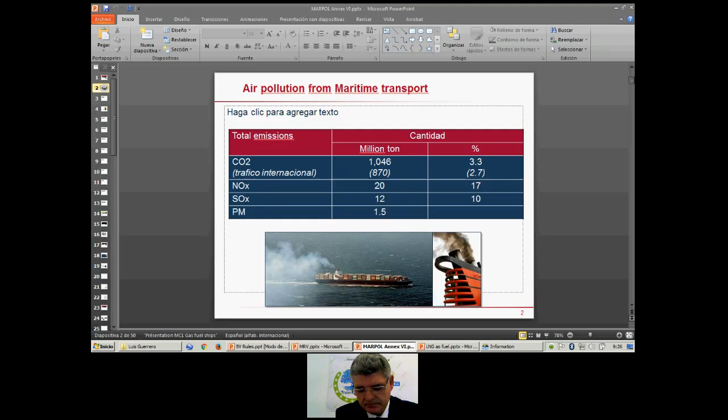Now we are going to concentrate our presentation on Annex 6. It means air pollution. Annex 6 is in force since May 2005. It applies to ships over 400 gross tonnage and also to offshore units built after 2005. The compliance of the ship with Annex 6 to MARPOL will be marked by the issuance of an IAPP certificate, International Air Pollution Prevention Certificate.

As I told you, Annex 6 was adopted in 1997, but it only entered into force 8 years later. You know, there's a ratification process, and it took 8 years to ratify and to enter into force. Its purpose, as I said, is to limit shipboard air pollution, ozone depleting substances, shipboard incineration, SOx, NOx, particulate matter, and volatile organic compounds.

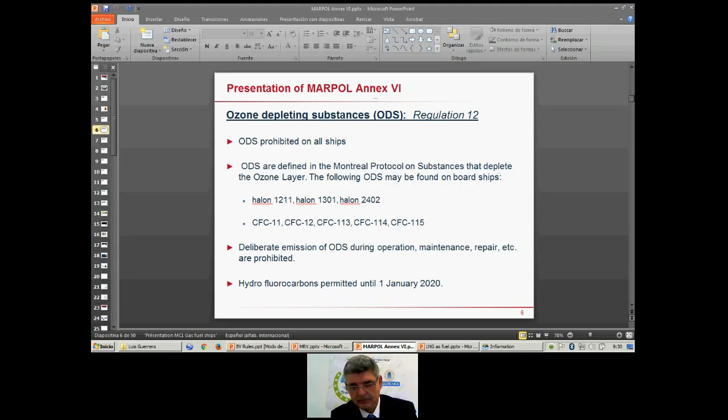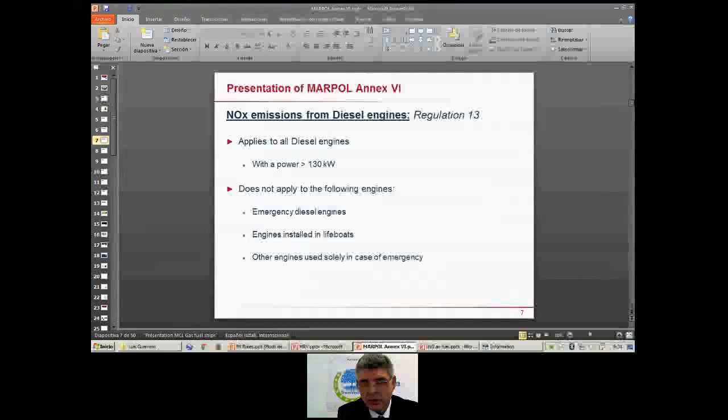For diesel engines, NOx are limited. This Annex 6 applies to diesel engines with a power over 130 kilowatts, and it doesn't apply to the following engines: emergency diesel engines, engines installed in lifeboats, other engines used only in case of emergency.

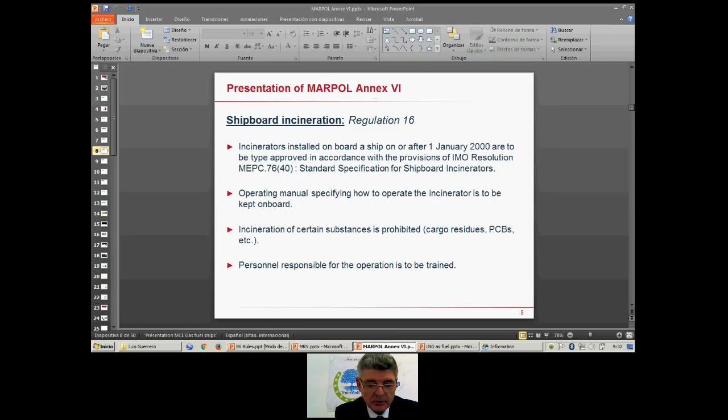For shipboard incineration, Annex 6 requires incinerators installed on board a ship after January 2000 to be type approved in accordance with requirements in the convention. There has to be an operating manual specifying how to operate the incinerator in order to facilitate the crew to use it and to prevent air pollution. Incineration of certain substances is prohibited, such as cargo residues, PCBs, and so on. Personnel responsible for the operation is to be trained.

Regarding fuel oil quality, the appropriate authorities will have to maintain and register a local fuel oil suppliers list. Details of fuel oils used on board shall be recorded by means of a bunker delivery note containing the following information: ship name, IMO number, port, and so on.

But the most important thing is the density at 15 degrees Celsius and the sulfur content, because the important thing for the annex is the sulfur content.

There has to be a declaration signed and certified by the fuel oil supplier representative that the fuel oil supplied is in conformity with Regulation 14 related to sulfur content and Regulation 18. You know that most fuels used in the marine industry are blended, so that is why the certification from the supplier is important, because only the supplier knows the composition of the blend and the sulfur content.

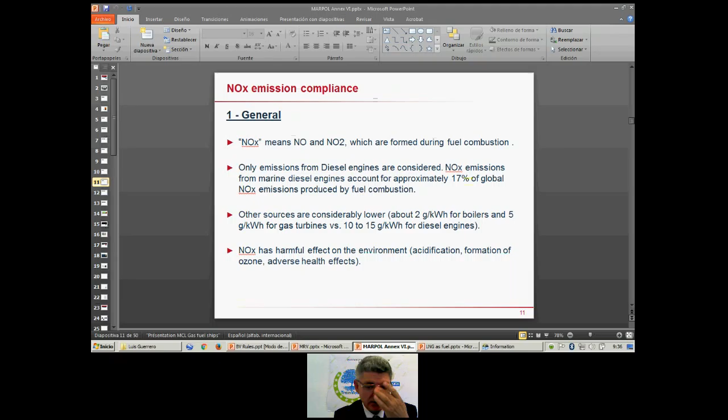The NOx emissions are influenced by the combustion process. It means that the NOx emissions depend on the technology of the engine. When the combustion temperature and duration increase, the amount of NOx formed increases too. Higher peak pressure and compression ratio result in higher NOx emission levels.

NOx influencing parameters include injection parameters: timing, nozzle, pump, fuel cam, injection pressure for common rail systems, and so on. Combustion chamber, cylinder head, piston, cylinder liner, compression ratio, valve timing, and charge air system: turbochargers, charge air cooler.

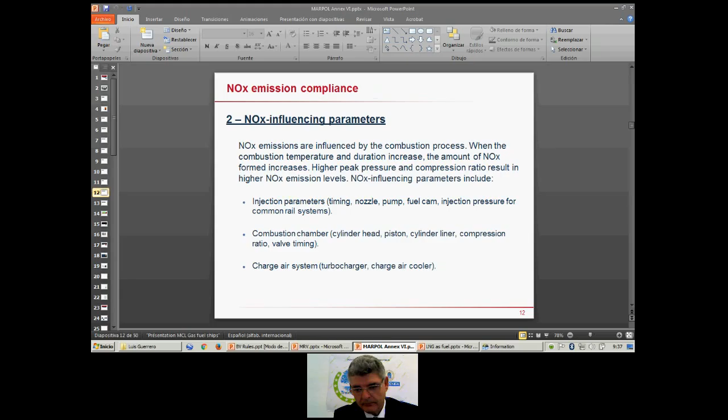Equipment to reduce NOx emissions: there are several solutions. Direct water injection, charge humidification, emulsified fuel water emulsion, exhaust gas recirculation, selective catalytic reduction, injection of urea solution. There are several ways. Only SCR is complying with Tier 3, that I will show you later.

But the purpose of all these methods is to reduce the temperature and the pressure inside the combustion chamber, in the cylinders of the engines.

Well, as a consequence of the Annex 6, some emission control areas have been established. You can see in the map there is an SOx. The emission control areas may be for SOx or for NOx or for both, or even for particulates. In the North Sea and the Baltic Sea, there is an emission control area for sulfur. It's called SECA.

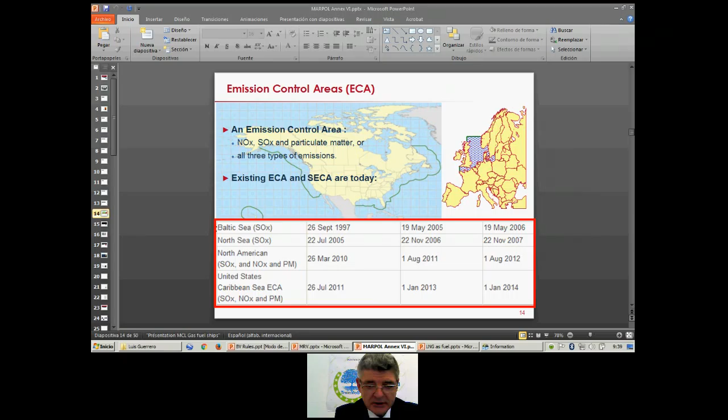But not only that, even in EU ports and in sulfur emission control areas, the maximum allowed is 0.1%. It means to reduce drastically. We have reduced drastically, and we can be satisfied with this achievement.

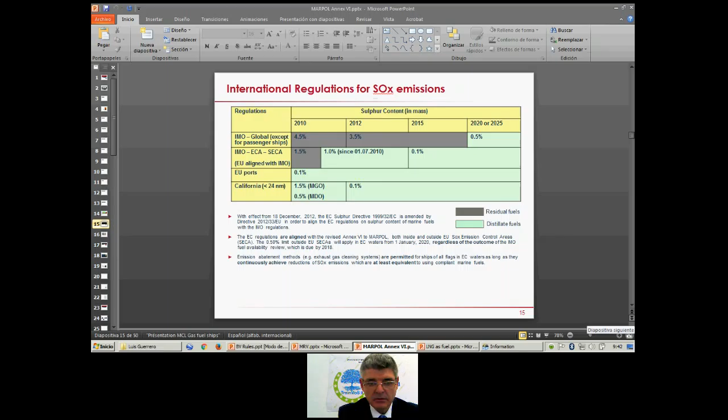It's not easy to reduce SOx emissions, because the sulfur content in the fuel is the one provided by the bunker supplier, and the sulfur existing in the fuel tanks will go out in the exhaust gas. So you have to either reduce the pollution caused by sulfur by using low sulfur fuels, or clean the exhaust gas.

But low sulfur fuels are more expensive, and cleaning of exhaust gases requires additional equipment, such as this one displayed in the picture, whereby you use some components and you will also recover a sludge or residue.

So you have two solutions: either reduce the sulfur in the fuel using marine gas oil or similar, or clean the exhaust gas with scrubbers that will produce a residue, caused by the treatment with soda, the sodium hydroxide.

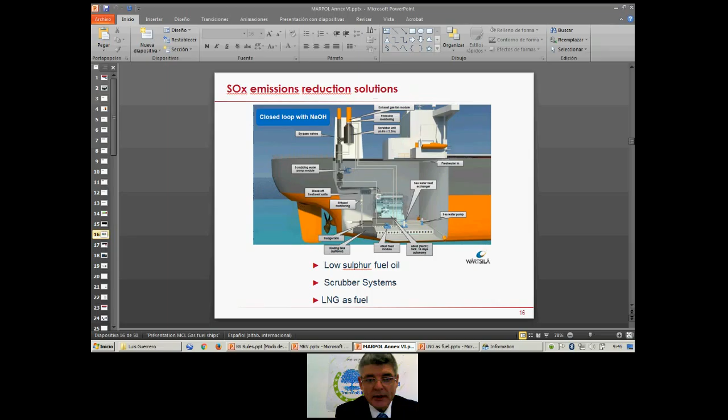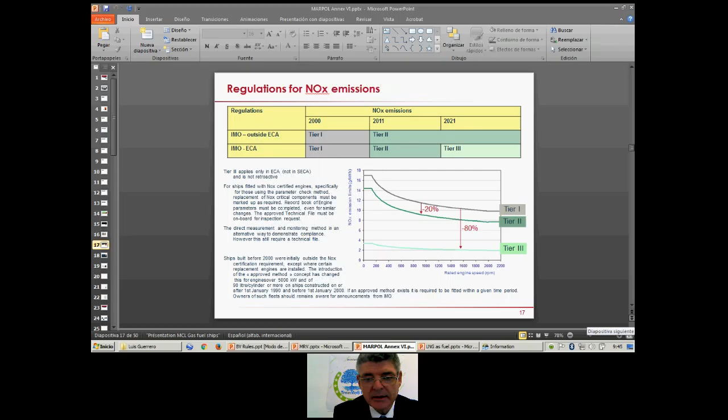Regarding NOx emissions, there was a timeline in order to reduce them, and I want to show you the evolution. This frame is more visual. There were 3 steps, the last one beginning January next year, so it's around the corner.

And it depends on the ship keel laydown. As I told you, the Tier 3 step begins on the 1st of January next year.

And the important thing, another satisfaction that we have in our industry, is that engine manufacturers have been able to provide the marine industry with new developments that have reduced NOx emissions by 80%. That is too much. We have to be proud of it and to recognize it.

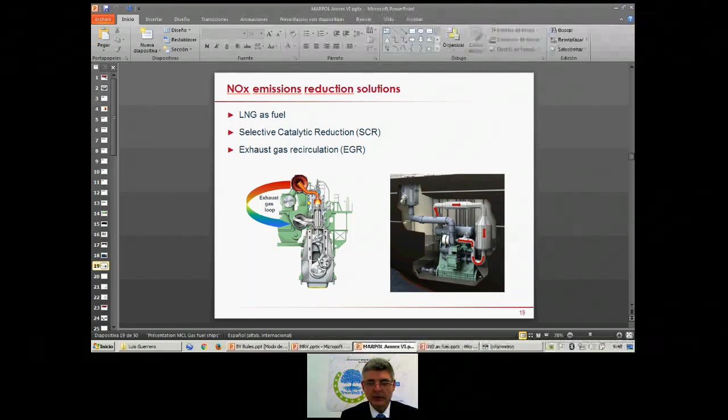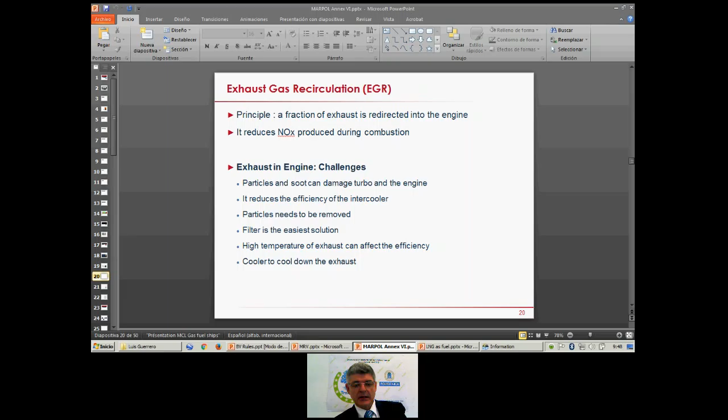I want to take it separately. The principle of EGR is to redirect a fraction of exhaust gas into the engine. It reduces NOx produced during combustion. The challenges: particles and soot can damage the turbo and the engine, it reduces the efficiency of the intercooler, and particles need to be removed. A filter is the easiest solution to prevent that problem. High temperature of exhaust can affect the efficiency, and we need a cooler to cool down the exhaust.

In brief, of what we have said so far: NOx emissions can be reduced with the technology. You can see in the graphic the peak of pressure and temperature where NOx develops. At this pressure, at maximum compression and maximum temperature in the cycle, the nitrogen molecule, which is very stable with a covalent triple link, breaks down at this pressure and temperature. It splits into atoms of nitrogen that combine with oxygen. That is what engine manufacturers want to avoid, with selective catalytic reduction and so on.

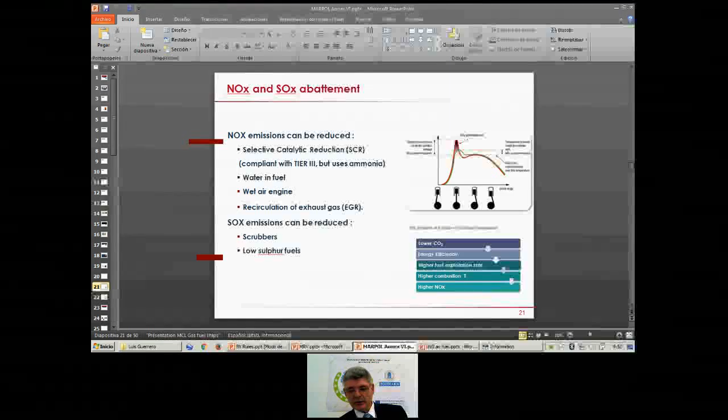Dual fuel engines are able to work on 2 cycles. The Otto cycle is an explosion engine, because the gas needs the Otto cycle to work, so you need a pilot diesel fuel that sparks the flame and burns the mixture of air and gas. Whereas when the engine uses liquid fuel, it works in the diesel cycle as usual. No spark is necessary, just the self-ignition temperature achieved with high pressure.

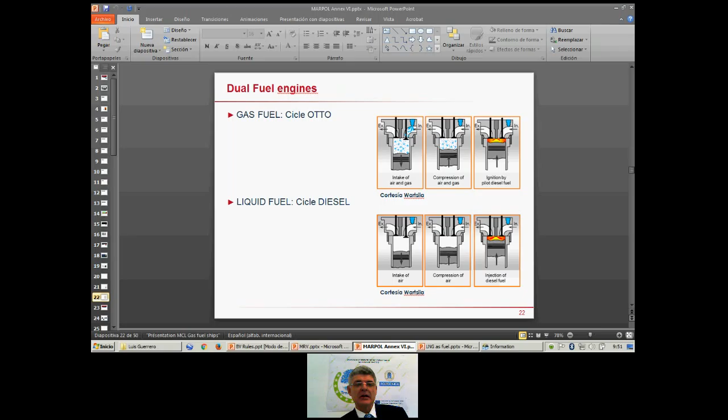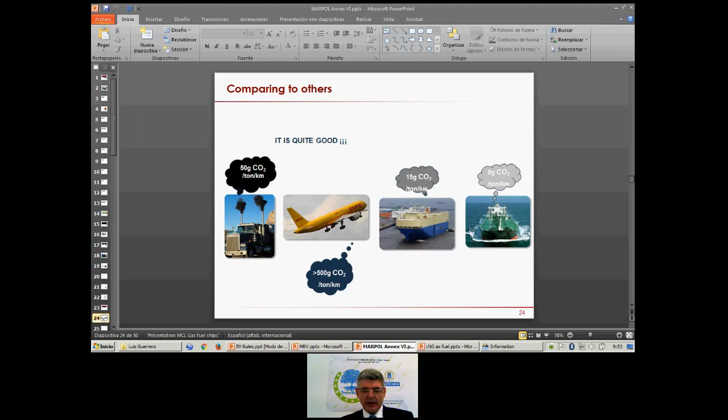So it's important, well, it's just for us to be happy, to be satisfied. But we know we can do something, we can go beyond these good figures. We have to reduce not only in comparison with others, but do the best we can. That is why there are several regulations, included also in Annex 6 to MARPOL.

The IMO, the International Maritime Organization, developed a tool to measure and compare energy efficiency of ship designs: the EEDI, the Energy Efficiency Design Index. We will talk later about another index, this one operational.

It is the EEOI. The comparison is not perfect, of course, because there's no consideration of seaworthiness and economy of scale of large ships, but it is usable, it's workable. It's progressively applicable to the majority of ship types. So far, it is not applicable to all kinds of propulsion systems.

The EEDI is mandatory for new ships whose building contract was placed after January 2013, so it's already in force, or delivered after 1st July 2015. So it is already in force.

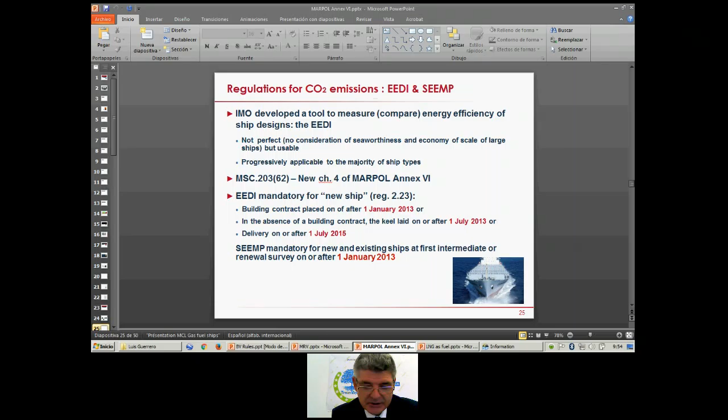In addition to this index, there is the SEEMP, mandatory for new and existing ships at first intermediate or renewal survey, or after 1st of January 2013. So the ships are already provided with this SEEMP. SEEMP is the Ship Energy Efficiency Management Plan.

Well, the CO2 reduction by means of a design index - the EEDI objective is to stimulate innovation and technical development in order to increase the energy efficiency from the design stage. Very important, because the reduction in fuel consumption is much cheaper since the very beginning, in the early design stage.

The formula for the index, for the EEDI, is a ratio between the environmental cost, meaning the CO2 emissions at 75% of maximum continuous rating of the engine, plus fixed auxiliaries power. It's a ratio between this environmental cost and the benefit for the society.

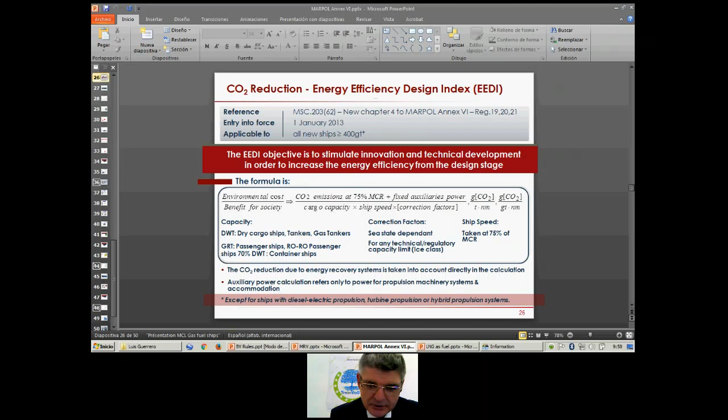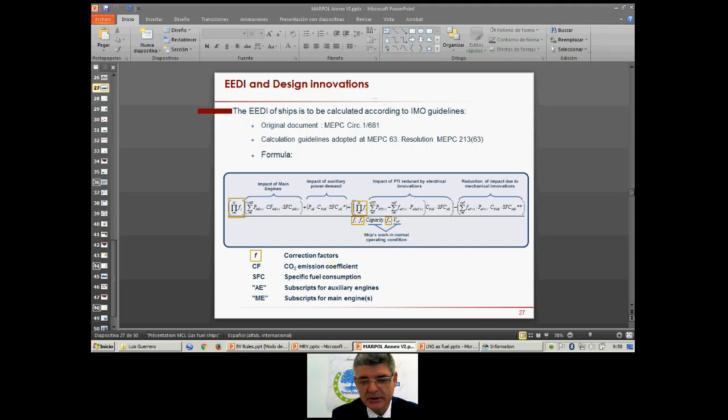The EEDI of ships is to be calculated according to the IMO guidelines. There's an original document with the calculation, the formula. The formula is quite big, but it's very simple in fact, because it's the CO2 emissions divided by cargo capacity, no more. There are some coefficients and so on, but it's very intuitive.

There are some curves for the ship to check that it is in compliance with the code. And the important thing is that there's a timeline in which the EEDI has to be improved at the individual stage. So the design will be more and more required, more demanding in the future.

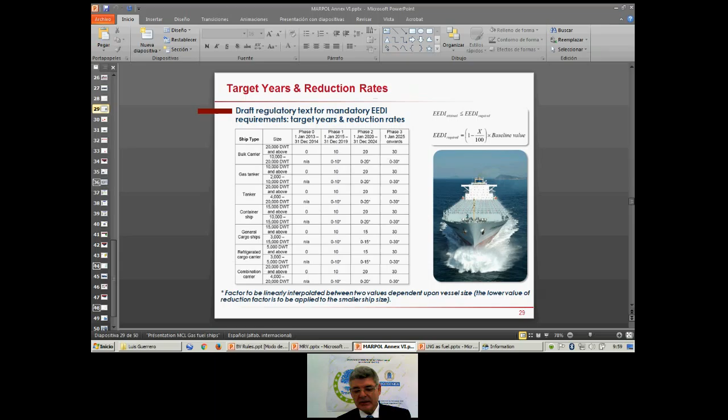Well, the certification of EEDI, just a quick overview. If there is a preliminary experience with ISO 9000, so we check the EEDI with computation or procedure to obtain the speed curves. Then we agree the test plan and check the ship model, and properly witness the key tank test and issue a pre-verification report.

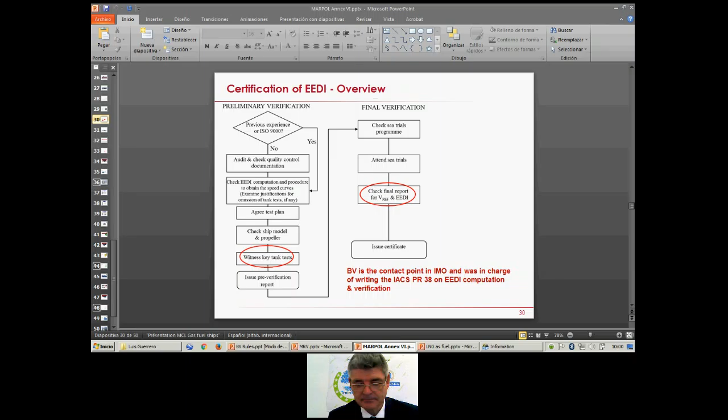But the final verification has to be carried out during the sea trials program, because you have to carry out a preliminary EEDI, but you have to verify the index during the sea trials, because it's part of the delivery of the ship. And there will be a certificate.

Some possible measures to improve the SEEMP.

Actions to reduce fuel consumption are quite varied and depend on the ship type, but some actions may be weather routing optimization, to measure the energy used and improve energy efficiency, optimization of commercial speed, just-in-time arrival, slow steaming and super slow steaming, which has been very used in recent years, not so often now with the low price of fuel.

Optimization of ballast and trim, retrofitting of ESDs - we will talk a little bit later about it - and periodic hull and propeller cleaning. Essential.

The same - we talked about an index for the design at the design stage. The annexes set up an index for the operation: the EEOI. The EEOI objective is to facilitate the quantitative monitoring of energy efficiency, and thus it may be used for the monitoring of the SEEMP.

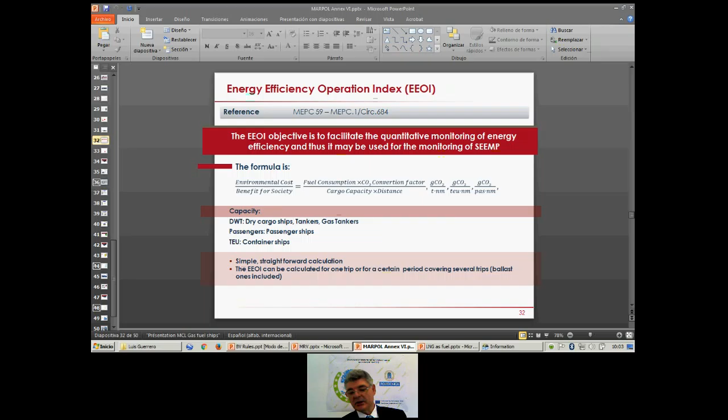The EEOI can be calculated for one trip or for a certain period, covering several trips, ballast ones included. So at the end, there will be an International Energy Efficiency Certificate placed on board the ship.

The Ship Energy Efficiency Management Plan is a tool for the ship owner to improve step by step and to reduce fuel consumption. And as I told you, it's mandatory since 2013, and all ship owners have to use it.

Classification societies have developed classification notations, even though it is a statutory requirement because it comes from the international convention. Classification societies have issued classification notations for this purpose.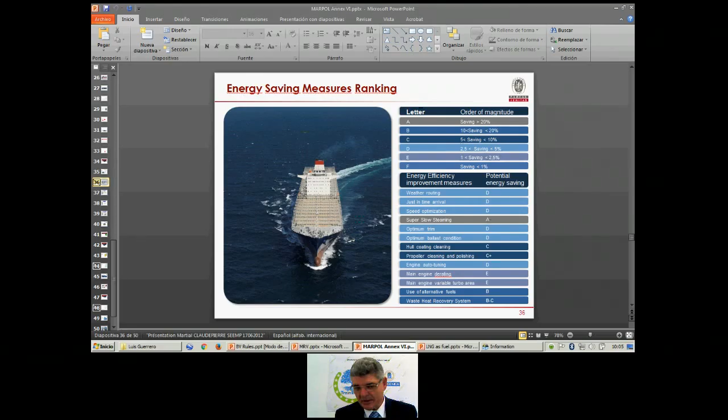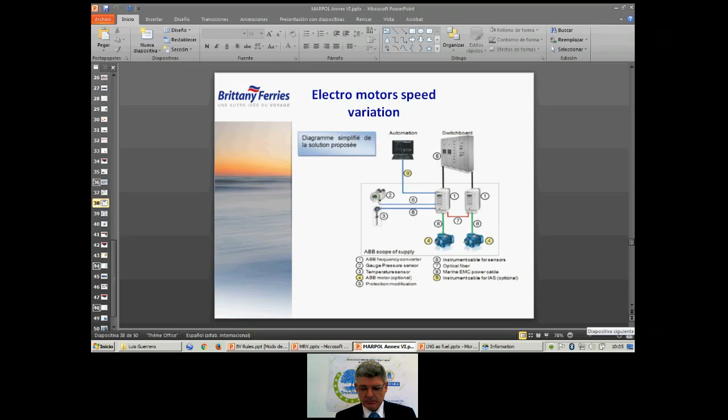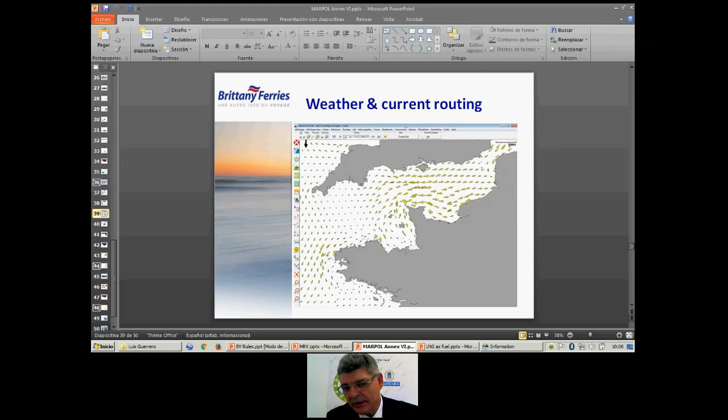The big owners use tools developed by themselves, by classification societies, or whatever, based not only on the machinery installations, but also on weather and current routing. It has to be uploaded into computer systems. There is software - Veritas and other classification societies have software to do it, taking into account all kinds of inputs, both from the technology of the ship and from the weather environment.

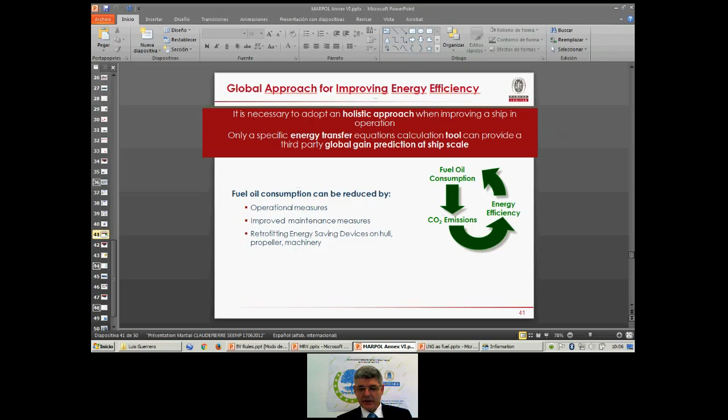So the fuel oil consumption can be reduced by operational measures, improved maintenance measures, and retrofitting energy-saving devices on the hull, what we call ESDs. ESDs are based on hydrodynamics, hydrodynamics in the propellers.

And also calculating the cavitation onset risks, and using examples for evaluation of propeller performances, and also the evaluation of energy saving devices close to the propellers, such as nozzles and so on.

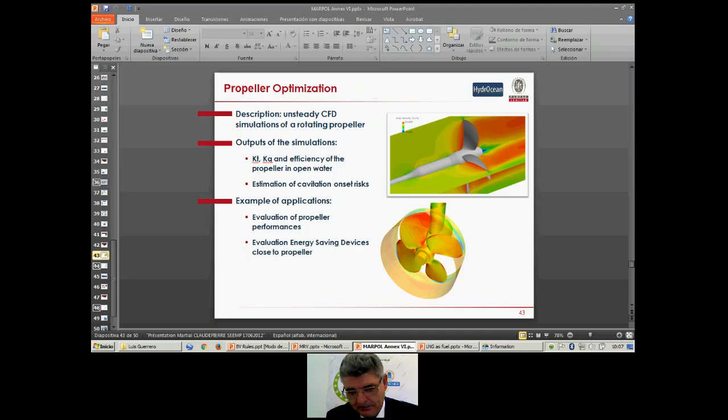Of the CFDs in the propeller and propulsion system, you have a CFD simulation for hull and appendages, including the propeller of course. Outputs of the simulations are propulsive performance of the ship, evaluation of hull-propeller-appendages interactions, cavitation onset risk, pressure pulses. Examples of applications are hull power optimization, appendages alignment, twisted rudder for instance, or shaft brackets, evaluation of several propeller performances.

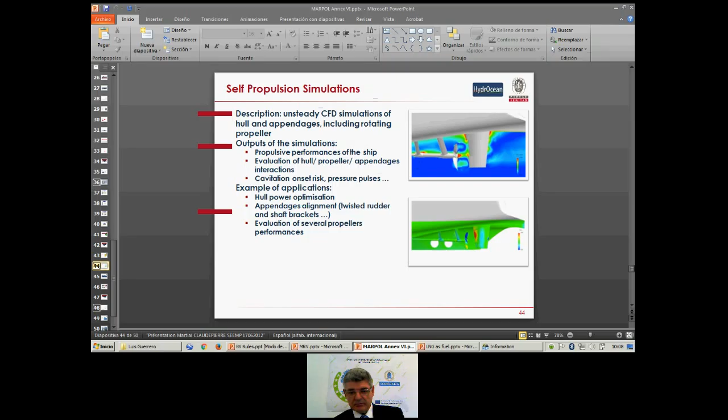We will see some pictures later. Not only that, but also trim optimization. You can see here some solutions.

Some of them are more realistic than others, but for instance, you can see the Mewis duct, a kind of collar around the shaft, and the air cushion. If the hull doesn't interact with water, the viscous resistance is less. Of course, the resistance to the advance of the ship is the addition of the one due to the viscosity of water and the waves created by the ship.

You can put some fins in front of the propeller. You can develop this kind of counter-rotative propeller, or a loaded tip propeller with a flange on the tip that increases - it's proven that it increases - the efficiency of the propeller, or you can use the twisted rudder. But anyhow, you can do a tank test, of course, but the most simple estimation is the use of computer programs, CFDs.

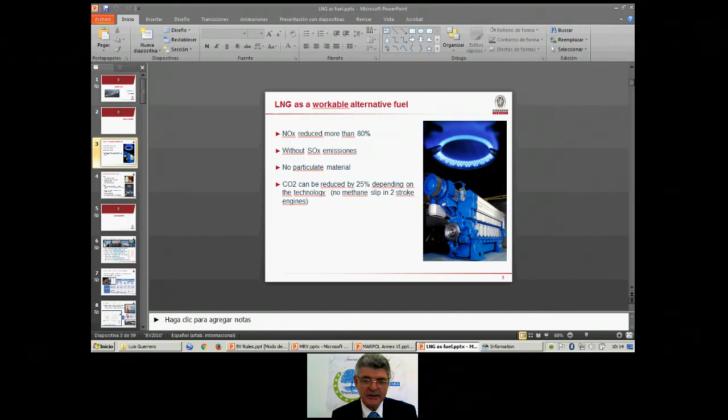In brief, these are some advantages of LNG as fuel that I want to talk about, giving you my view. Compared to other fuels, LNG has better energy efficiency, with no residues, unlike scrubbers.

You remember that when I told you about scrubbers, there were some residues from cleaning the exhaust gas. LNG reduces air pollution, and there's an additional advantage: less noise and vibrations in the diesel engines.

The cons are that LNG needs more storage, because 1 liter of LNG is equivalent to 0.6 liters of gas oil. If you need fuel for sailing in open seas, you need certain kinds of tanks, so you need more storage, more tank volume.

The logistics of LNG are not available at some ports yet, but this is going to be solved, at least in Europe, the States and Canada. The crew needs to be trained and qualified. The return on investment is an issue too, because the engines are more expensive and the installation is more expensive, since the LNG piping has to be double wall with requirements that make installation costlier than conventional fuels. And there's not enough experience with the regulation yet.

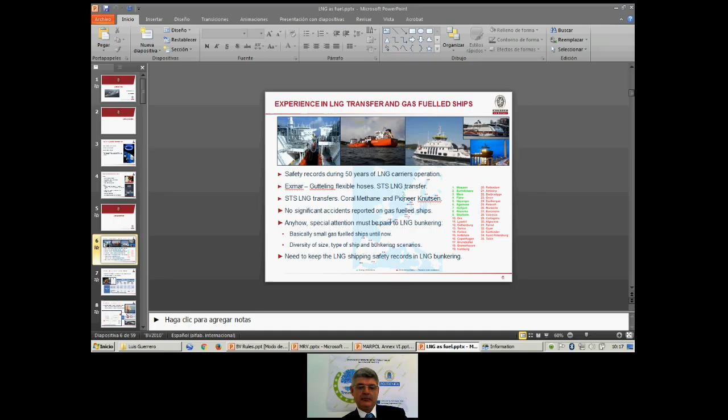Guidelines and possibilities for LNG bunkering have been issued by all classification societies, each with its own rules. There are several scenarios that have to be taken into account, depending on the type of bunkering facility and the type of receiving ship, specifically the type of tank on board the receiving ship and the type of tank in the bunkering facility.

Depending on the bunkering facility, it could be a bunker ship, a tank truck, or a shore-based Type C tank. Type C means pressurized tank, usually cylindrical, bilobular, or even globular, but so far mostly cylindrical under pressure. There can also be atmospheric tanks, either on bunker ships or shore-based. Likewise, the receiving ship can have a Type C tank or an atmospheric tank.

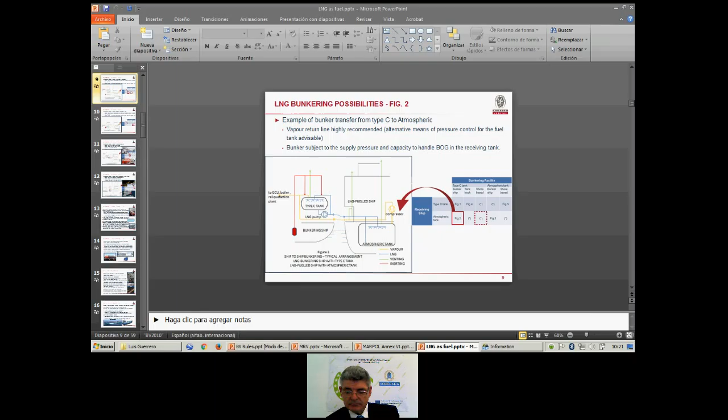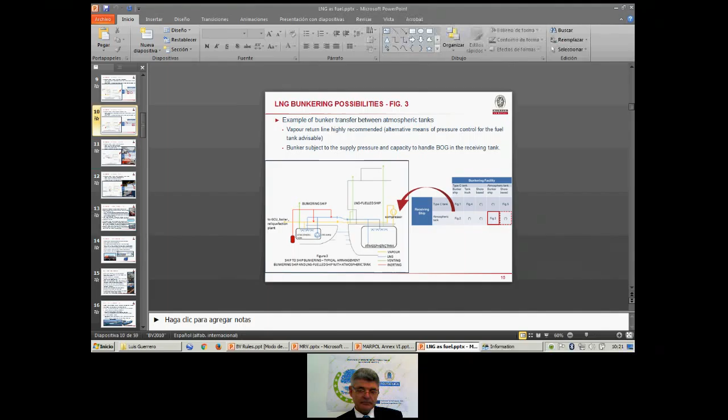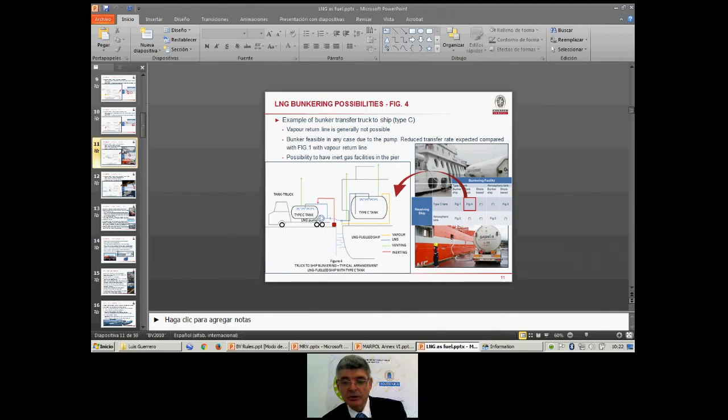And in this case, the tank truck is fitting the Type C tank on board the ship. The capacity of transfer of LNG is rather small, and is better for small yachts or for yachts, or not for very big ships, because it takes hours to complete a bunker operation.

LNG bunkering, general technical issues. There are some technical issues that we have to take into account, detailed in the regulation, both in the Bureau Veritas regulations or in other places. You have to consider compatibility of equipment between the supplier and the ship - adequate compatible pressure and temperature in receiving tanks and bunkering rates.

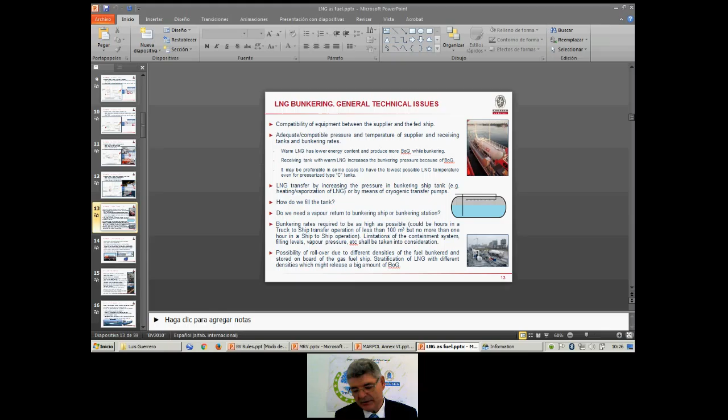When we mix LNGs with different ages, they can stratify. But before stratifying, they mix the hydrocarbons, let's say, and the movement of the hydrocarbons develops more boil off gas. It increases the pressure.

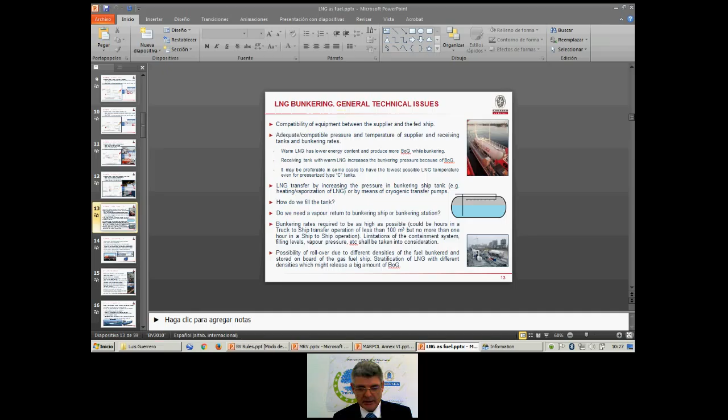So one of the problems with LNG storage on ships is that it cannot wait. The storage cannot wait a long time without particular precaution.

LNG, some additional operational issues - questions that will depend on the terminal, on the port terminal, on the port policy. Bunkering permitted while commercial operations are taking place. First, what happens in case of passenger ships? Some ports with LNG will allow it and some others will not.

In the beginning, all the precautions are necessary, but we have to compare, for instance, with commercial aviation - we board the airplanes while they are bunkering.

Nothing new for us. Can there be simultaneous bunkering and loading operations - fuel, oil, water, sludge? How to measure the LNG transport? Because the natural gas price is by energy content - you buy some calories, some power.

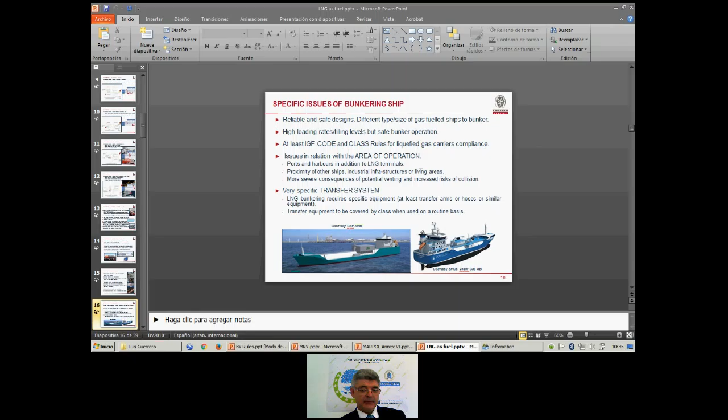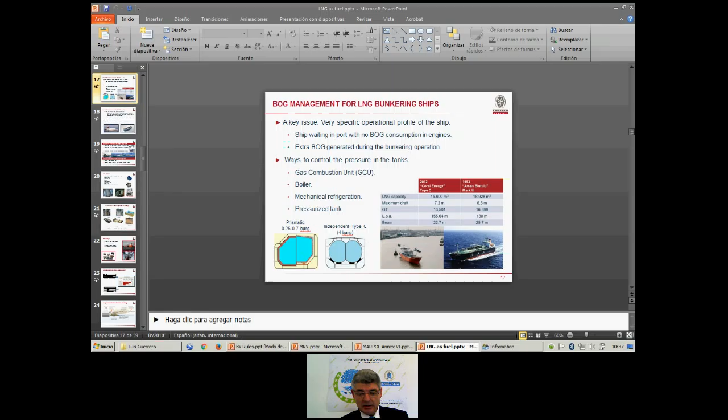In this picture, we have prismatic tanks that can withstand a small overpressure up to 0.7 bar, whereas an independent Type C tank may withstand 4 bar or more. This is a very low one.

Boil-off gas management for LNG bunkering ships. As I told you, the LNG tank pressure and temperature control may be kept by the reliquefaction units that keep the cargo cool and liquefy the boil-off gas. Well, it's one solution, but liquefaction plants and units are expensive.

Very cool cargo means less extra boil-off gas during transfer and more energy content in the fuel transfer. On the contrary, high pressure or temperature lead to specific issues when bunkering atmospheric tanks because of the overpressure. But venting must be avoided, and the area of venting necessary for emergency purposes is considered a dangerous zone.

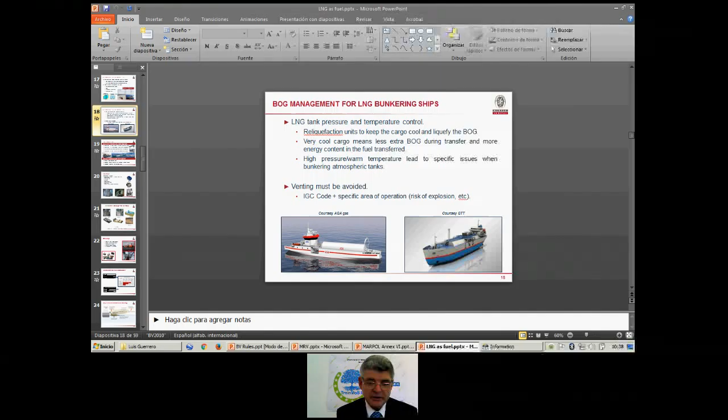There are quite a few experiences, so it's not rather new, the LNG bunkering ships. We have a lot of references. More and more bunkering ships are under construction because, as I told you, the price is not the driver of the industry, but the environmental capacity of LNG to meet the requirements, to reduce the NOx, SOx, and CO2.

The tool used is the risk assessment. We count all the risks, we count the likelihood of happening, and the severity. So it's a normal risk assessment technique.

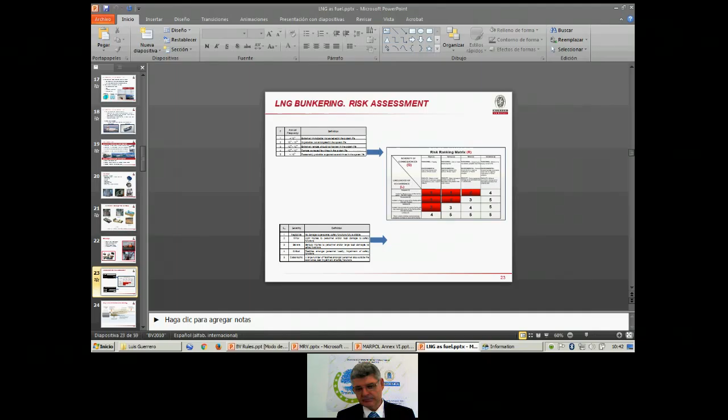Why a risk assessment for LNG bunkering? Not only for the ship, but also for the bunkering. Because, for instance, if there is a spill in case of wind, the cloud may go out of the vessel and expand to other areas. And when there is an ignition source, there may be a burn, or the gas may enter in contact with water, and then we have the explosion.

It was the case in Skikda in Algeria, where there was an explosion 7 years ago, and we have to prevent these situations from happening.

Regarding the bunkering station, the main concerns are ventilation, leakage prevention, and detection. The manifold must be able to avoid the connection hose breaking in case of extreme relative motion or emergency. There has to be fire detection and extinction, as always we are in the presence of gas.

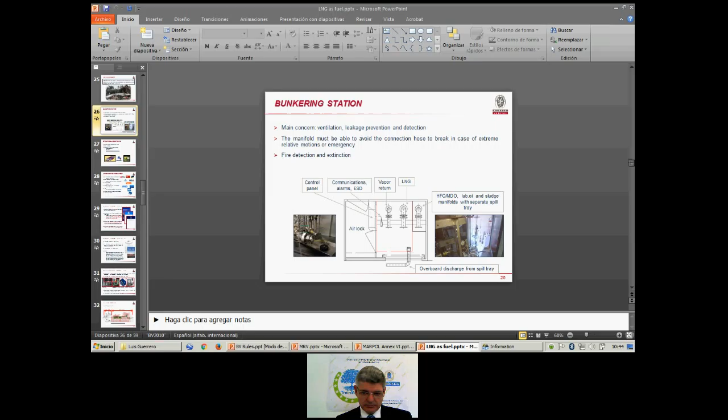As operational constraints, we have to take into account relative motions, ship quay and the gap, draft variations depending on the type, mooring in different ways depending on the type and the cargo of the ship, mooring in different weather conditions, the meteorological data, ship data. But there are some software tools to help ship operators carry out these tasks safely.

There are quite a few regulatory LNG bunkering regulations, depending on the port authority and so on. There are also a lot of standards, not only for the ship. Standards are based on the IMO standards, the IGF code, and the classification rules from the classification societies, but there are also operational guidelines and rules from port authorities and national authorities.

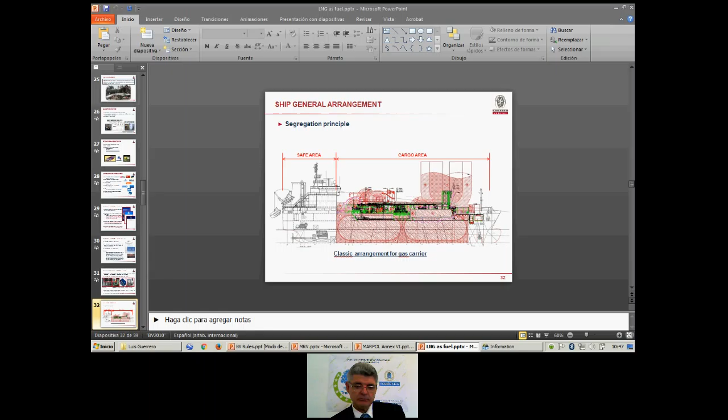But for instance, in a passenger vessel, the hazardous area is not only the tank area, but also the machinery spaces, and also the vents at the upper deck, the ventilations at the upper deck, and the areas surrounding it. They have to comply with some requirements.

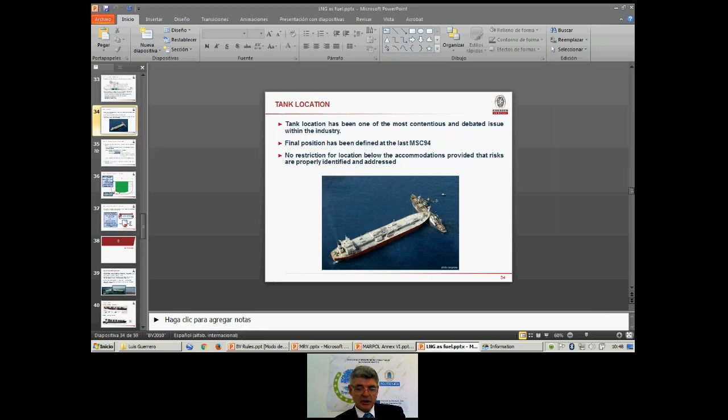The distance, there are two methods. One is the deterministic method. It requires for passenger ships, the minimum distance is the breadth divided by 10 for passenger ships, another amount for cargo ships, and also a distance from the ship bottom in case of landing with an obstacle or something like that.

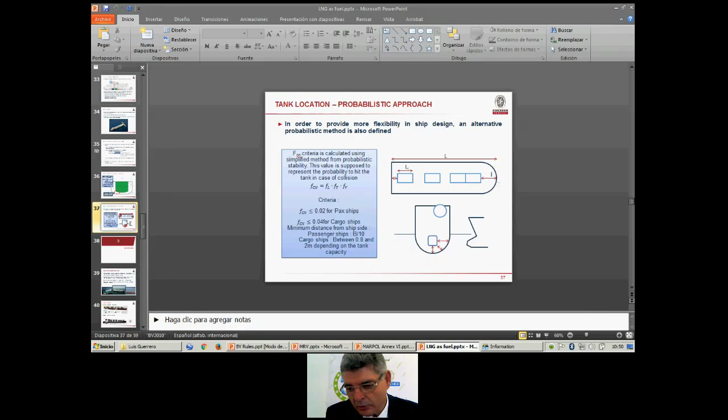So if you don't, as a designer, you have two choices. We have, as I told you, a lot of references of ships fueled by LNG with an excellent track record, well, over 50 years. So we can trust this is one alternative to other fuel. LNG is a second alternative.

It's a new system that has to be taken into account. It's valid for all kinds of ships, for instance, container vessels, very big container vessels, feeders, small feeders.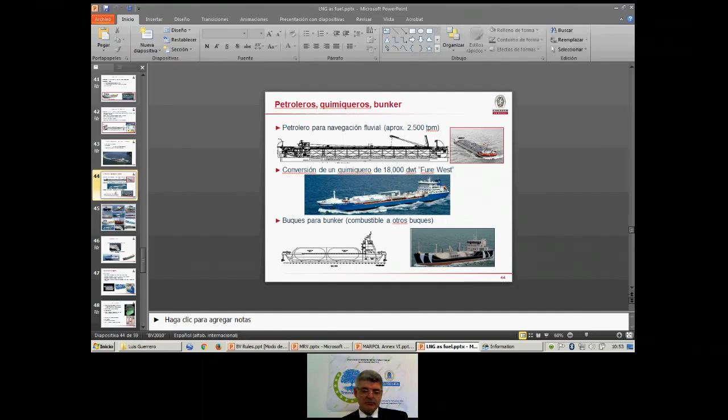So there are quite a few references. And I think we are working at this moment with the conversion of passenger ferries. They are converting generator sets for energy consumption at port, not in open seas, but at port. The generator sets are under conversion to LNG in some cases, of course.

So there is another owner converting the car carriers and ferries to propulsion by LNG. There are several projects of LNG bunker ships. And also, the technology of engines, main manufacturers are developing their designs.

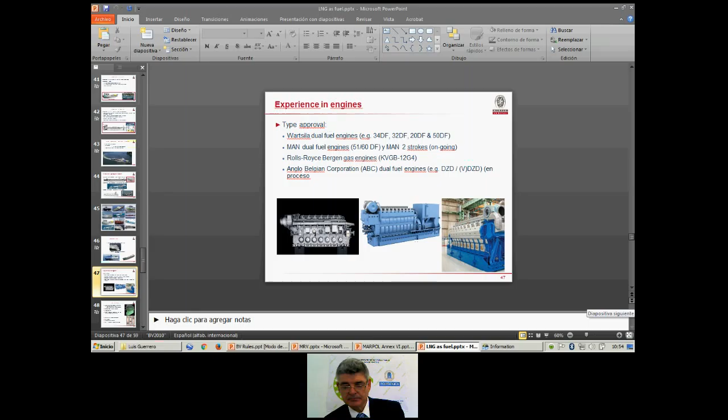You know, there are two ways, two solutions. One is 4 strokes, another is 2 strokes. One, Rolls-Royce, another fuel that is more and more considered is ethane. Ethane, because there is an oversupply of ethane as an additional product of other processes, a mid product, let's say.

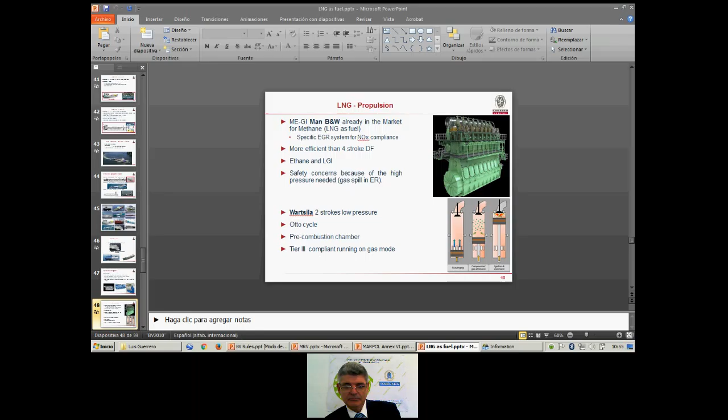And there are already ships fueled by ethane and engines ready to burn ethane. Well, there are other examples, as you have seen, mostly with Type C cylindrical tanks.

More examples. Am I going forward or backwards? No, it's okay, it's okay.

There are other examples in Norway, Denmark, Canada, and you can see that it's more frequent in countries within sulfur or nitrogen emission control areas. But all the European ports, in fact, are control areas because the maximum sulfur is 0.1.

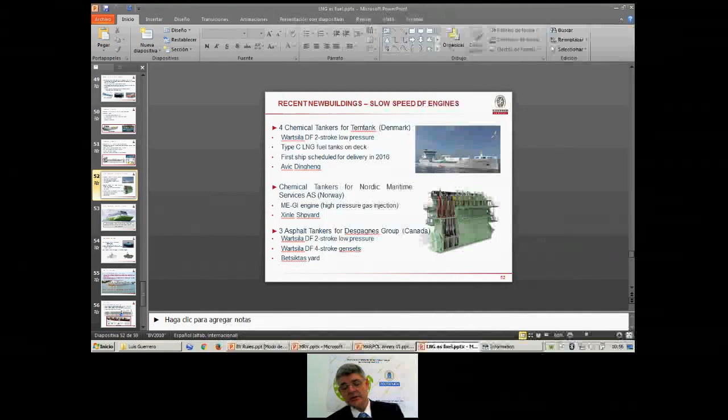And it's a very interesting solution because when a lot of cruise vessels come to a port, if they were connected to the town's electrical network, it may collapse. So it's not a solution. Cold ironing is not a solution unless it is prepared, of course.

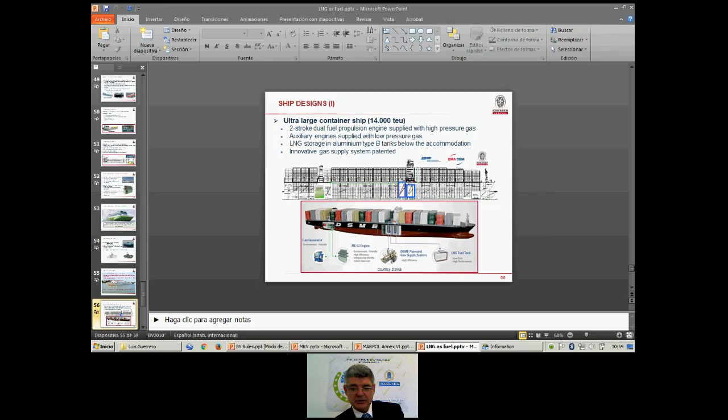There are more projects, and that is why I wanted to tell you about LNG, which is very important and will play an important role in marine propulsion. I would like to tell you something about the European regulation, because it's related to emissions, which is the main part of my presentation: the new European regulation MRV.

It's a European regulation, only applicable in the European Union. The regulation is for the monitoring, reporting, and verification of CO2 emissions from maritime transport. It was adopted by the European Parliament this year and will enter into force immediately.

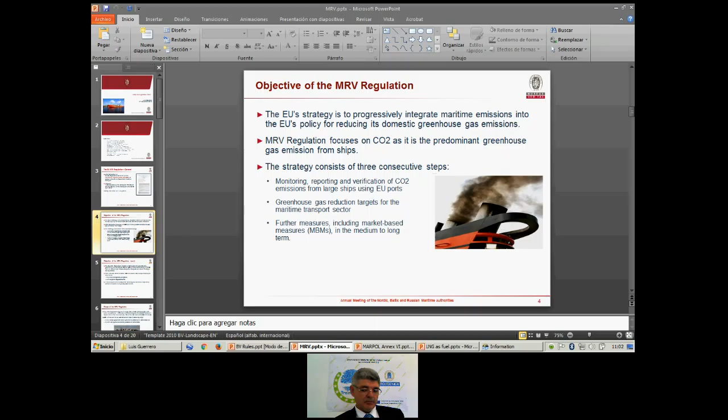The MRV regulation creates a framework for collecting and publishing verified annual data on CO2 emissions and energy efficiency from all large ships that use European ports, regardless of where the ships are registered. From January 2018 onwards, once it enters into force, CO2 emissions and energy efficiency will have to be monitored and reported by companies and verified by an independent verifier. A valid document of compliance issued by the verifier will have to be carried on board ships subject to MRV—there has to be a certificate or a document.

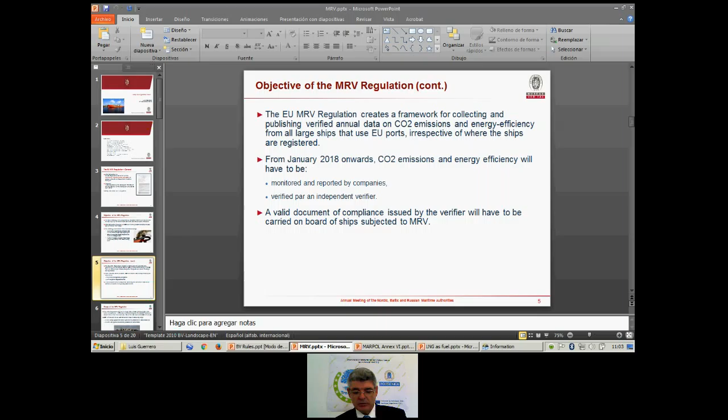The scope of the regulation applies to ships over 5,000 gross tonnage, with some exceptions, as we will see. It should be noted that ships below 5,000 gross tons are almost half of the fleet, but only 10% of the emissions. That is why they have been kept outside of the regulation.

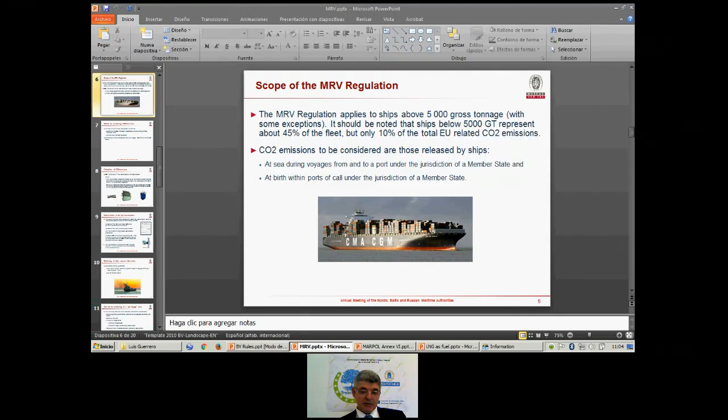CO2 emissions are to be considered as released by ships at sea during voyages from and to a port under the jurisdiction of a European state, or at berth within ports under the jurisdiction of a member state.

Method for monitoring CO2 emissions for each of the ships: every company has to determine the CO2 emissions in accordance with one of the methods permitted by regulation, and monitor other relevant information. Monitoring is to be carried out on a per voyage basis and on an annual basis—so you have to do it twice.

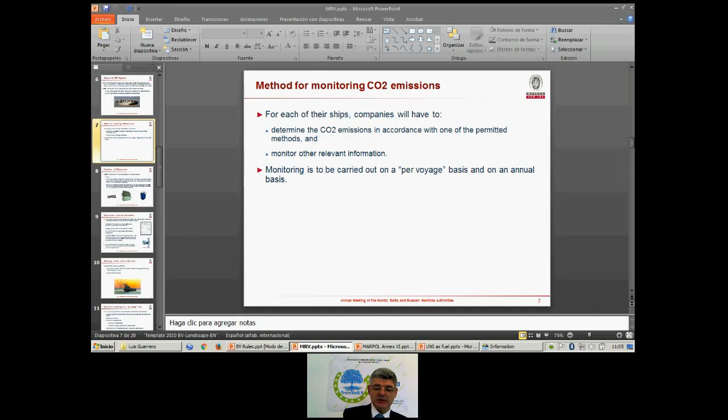How do we calculate the CO2 emissions? There is a fuel consumption; we know the fuel consumption, and we multiply it by an emission factor. The fuel consumption includes fuel consumed by main engines, auxiliary engines, gas turbines, boilers, and inert gas generators. Fuel consumption within port at berth is to be calculated separately, so you have fuel consumption in main engines, and also fuel consumption at port calculated separately. The emission factor is a factor for converting fuel consumption into CO2 emission. Default values are used in principle unless the company uses data on fuel quality from the bunker delivery note—there are some default values unless you have more precise ones.

Determination of fuel consumption is for a ship and its voyage. The actual fuel consumption has to be calculated based on one of the following methods: bunker fuel delivery note and periodic stock takes of fuel tanks, bunker fuel tank monitoring on board, flow meters for applicable combustion processes, or direct CO2 emissions measurements. If this method is used, the fuel consumptions have to be calculated from the CO2 emissions and the relevant emission factors.

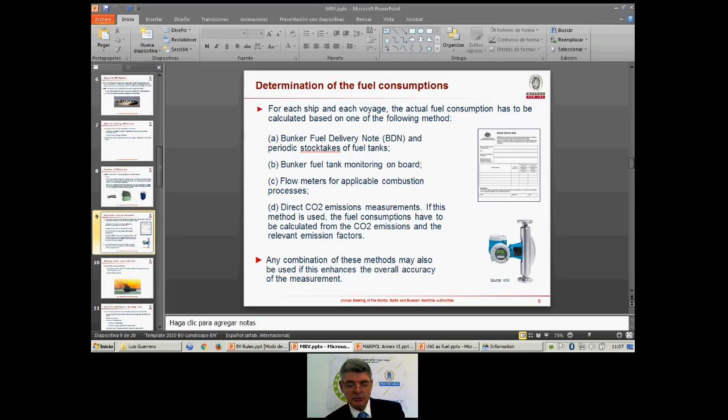Monitoring is to be performed, as I told you, on a per voyage basis, except for ships performing a lot of voyages per year, or more than 300 voyages per year, on an annual basis.

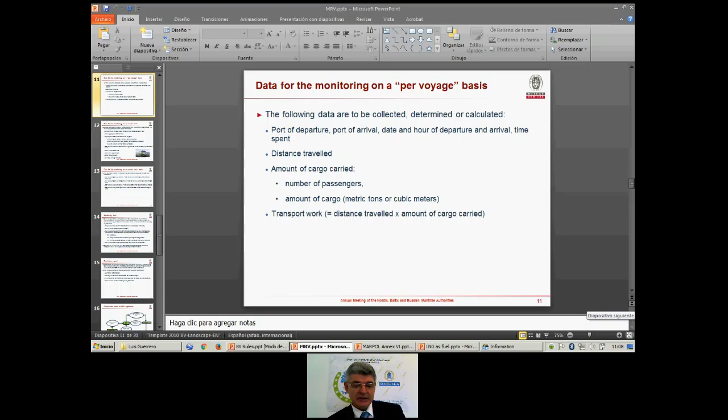The following data are to be collected, determined, and calculated: port of departure, port of arrival, date and hour of departure and arrival, distance traveled, amount of cargo carried, number of passengers, distance, and so on, in order to calculate the index at the end. Values are determined by aggregation of the relevant per voyage data.

The following parameters are to be monitored: amount and emission factor for each type of fuel consumed in total, total aggregated CO2 emitted, aggregated CO2 emissions from all voyages between ports under a member state's jurisdiction, which departed from ports or to ports under a member state's jurisdiction. CO2 emissions which occurred within ports under a member state jurisdiction at berth. Total distance traveled, total time spent at sea, total transport work, average energy efficiency.

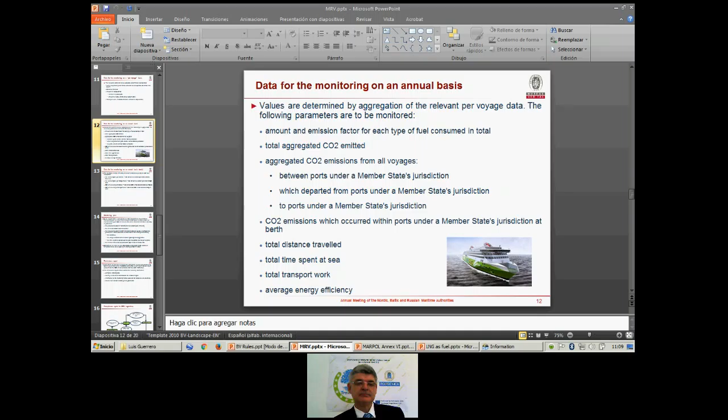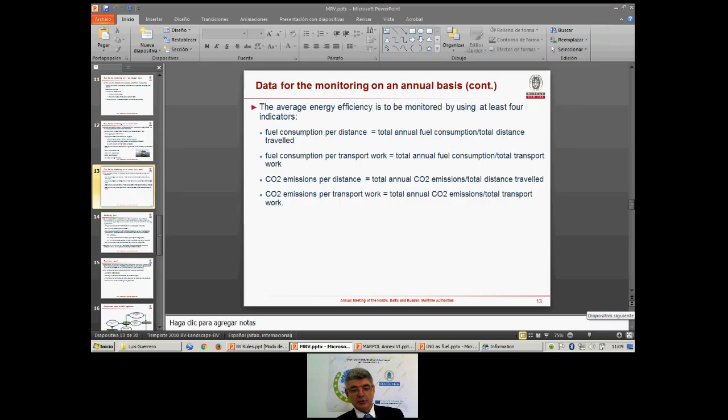The average energy efficiency is to be monitored by using at least 4 indicators: fuel consumption per distance, fuel consumption per transport work, CO2 emissions per distance, CO2 emissions per transport work.

By August 2017, companies will have to submit to the verifiers a monitoring plan for each of their ships, indicating the methods chosen to monitor and report CO2 emissions and other relevant information, including in particular the procedures used for monitoring the fuel consumption of the ship, the emission factors used for each fuel, the procedures used for determining activity data per voyage, in particular the procedures, data sources, and formulae used for determining and recording the distance, the cargo carried, and number of passengers as applicable, the time spent at sea between the port of departure and the port of arrival, and the method to be used for closing data gaps in case of missing data.

Companies will have to use standardized monitoring plans based on templates to be developed. They are not available yet.

And then the report: from 2019, every year, companies will have to submit to the Commission and to the flag state authorities a verified emissions report concerning the CO2 emissions and other relevant information. The emissions report should contain the following information: company data, identify the verifier that assessed the emissions report, information of the monitoring method used and the related level of uncertainty, results from annual monitoring of the parameters.

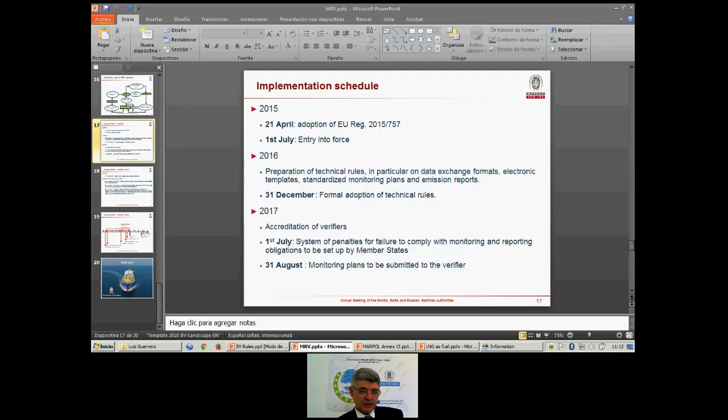The important thing is to know that it entered into force this year. During next year, shipowners have to prepare the technical rules, and in 2 years' time, the verifiers will be accredited, and the monitoring plans have to be submitted to be verified by the verifier.

In 2018, the per voyage monitoring begins, and in 2019 and subsequent years, every 30th of April, the report has to be submitted to the Commission and flag authorities. In June, the document of compliance has to be issued by the verifier, has to be available, and also the Commission will make publicly available the information of CO2 emissions, fuel consumption, technical efficiency of the ship, and so on.